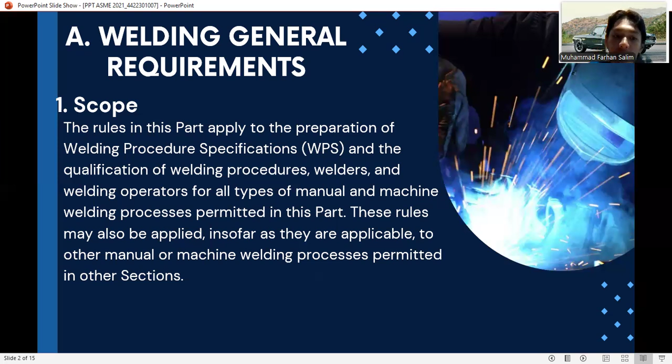Two, procedure specification. The WPS used by an organization that will have responsible operational control of production welding shall be a WPS that has been qualified by that organization in accordance with Article 2, or it shall be an AWS Standard Welding Procedure Specification, or SWPS, listed in Mandatory Appendix E and adopted by that organization in accordance with Article 5.

Both WPS and SWPS specify the variables, including ranges, if any, under which welding must be performed. These conditions include the base metals that are permitted, the filler metal that must be used, if any, preheat and post-weld heat treatment requirements. When a WPS is to be prepared by the organization, it must address as a minimum the specific variables, both essential and non-essential, as provided in Article 2 for each process to be used in production welding.

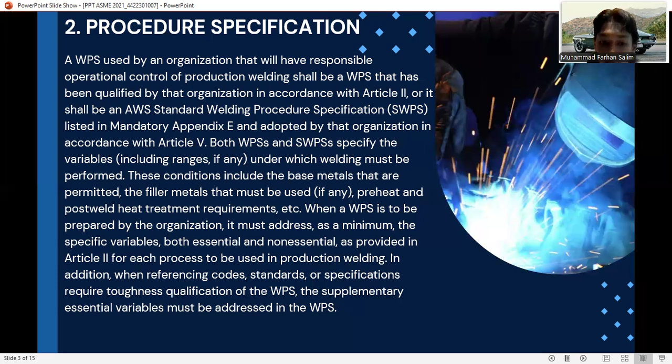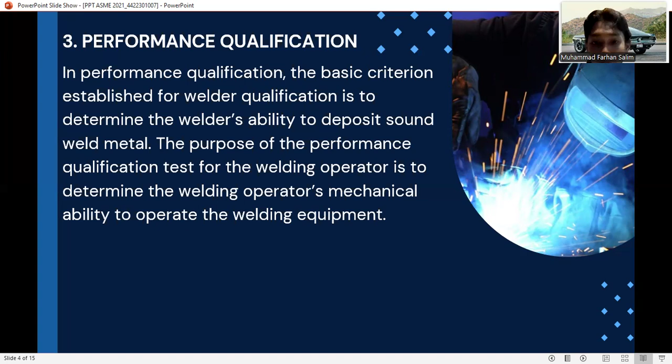Three, performance qualification. In performance qualification, the basic criterion established for welder qualification is to determine the welder's ability to deposit sound weld metal. The purpose of the performance qualification test for the welding operator is to determine the welding operator's mechanical ability to operate the welding equipment.

Four. There are test positions for groove welds and test positions for fillet welds. Groove welds may be made in test coupons oriented in any of the positions described in the following paragraphs, except that an angular deviation of plus or minus 15 degrees from the specified horizontal and vertical planes, and an angular deviation of plus or minus 5 degrees from the specified inclined plane, are permitted during welding.

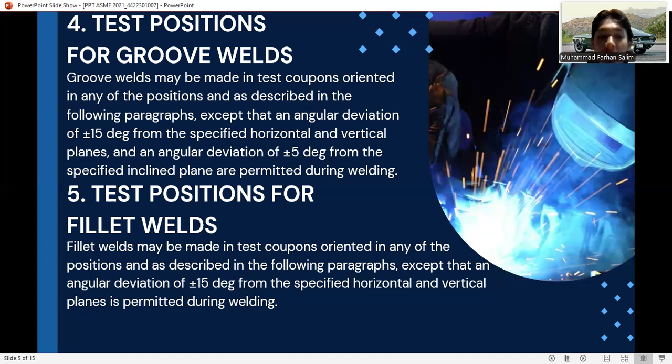And fillet welds may be made in test coupons oriented in any of the positions described in the following paragraphs, except that an angular deviation of plus or minus 15 degrees from the specified horizontal and vertical planes is permitted during welding. There are plate positions for groove and pipe positions for groove.

In plate positions for groove, there are four positions. One, flat position 1G, plate in a horizontal plane with the weld metal deposited from above. Two, horizontal position 2G, plate in a vertical plane with the axis of the weld horizontal. Three, vertical position 3G, plate in a vertical plane with the axis of the weld vertical. And last is overhead position 4G, plate in a horizontal plane with the weld metal deposited from underneath.

There is another material, the pipe positions for groove. There are four pipe positions. First is pipe position 1G, pipe with its axis horizontal and rolled during welding so that the weld metal is deposited from above. Two, horizontal position 2G, pipe with its axis vertical and the axis of the weld in a horizontal plane. Pipe shall not be rotated during welding.

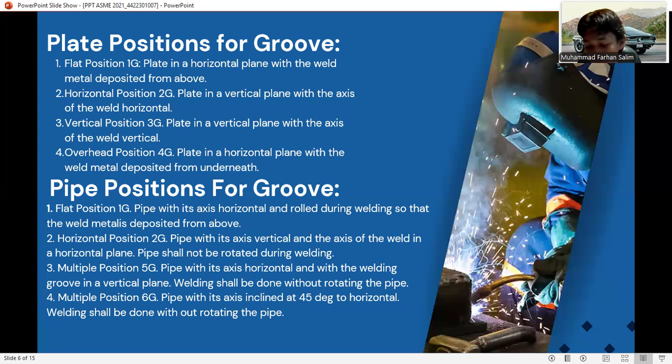And there are plate positions and pipe positions for fillet. First, flat position 1F, plates so placed that the weld is deposited with its axis horizontal and its throat vertical. Two, horizontal position 2F, plates so placed that the weld is deposited with its axis horizontal on the upper side of the horizontal surface and against the vertical surface.

Three, vertical position 3F, plates so placed that the weld is deposited with its axis vertical. And last, overhead position 4F, plates so placed that the weld is deposited with its axis horizontal on the underside of the horizontal surface and against the vertical surface.

And there are pipe positions for fillet. First is flat position 1F: pipe with its axis inclined at 45 degrees to horizontal and rotated during welding so that the weld metal is deposited from above, and that at the point of deposition the axis of the weld is horizontal and the throat vertical.

2. Horizontal positions 2F and 2FR. A. Position 2F: pipe with axis vertical so that the weld is deposited on the upper side of the horizontal surface and against the vertical surface. The axis of the weld will be horizontal and the pipe is not to be rotated during welding. B. Position 2FR: pipe with its axis horizontal and the axis of the deposited weld in the vertical plane. The pipe is rotated during welding.

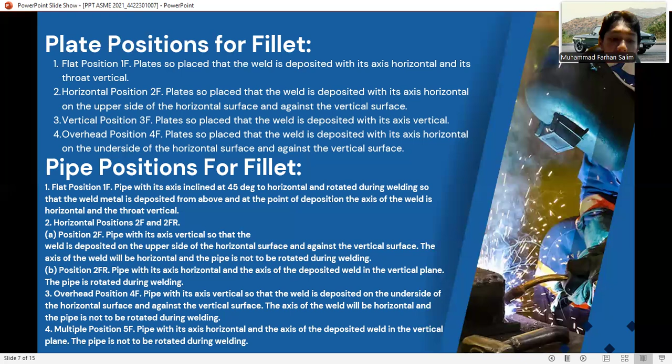3. Overhead position 4F: pipe with its axis vertical so that the weld is deposited on the underside of the horizontal surface and against the vertical surface. The axis of the weld will be horizontal and the pipe is not to be rotated during welding. And last, multiple position 5F: pipe with its axis horizontal and the axis of the deposited weld in the vertical plane. The pipe is not to be rotated during welding.

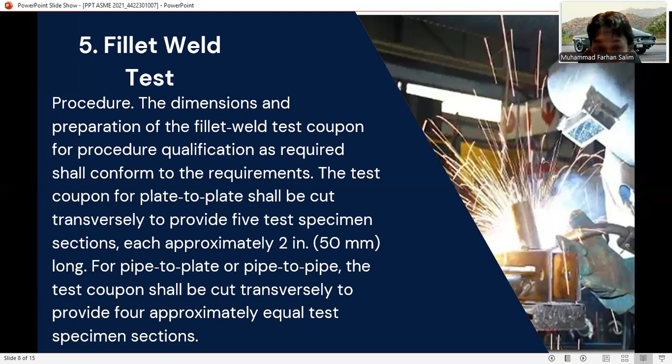And 5 is fillet weld. First is test procedure. The dimensions and preparation of the fillet weld test coupons for procedure qualification as required shall conform to the requirements. The test coupon for plate to plate shall be cut transversely to provide 5 test specimen sections, each approximately 2 in. (50 millimeters) long. For pipe to plate or pipe to pipe, the test coupon shall be cut transversely to provide four approximately equal test specimen sections.

And title B is welding procedure qualification. Each organization shall prepare written welding procedure specifications that are defined as follows. A. Welding Procedure Specification, or WPS. A WPS is a written qualified welding procedure prepared to provide direction for making production welds to code requirements. The WPS or other documents may be used to provide direction to the welder or welding operator to assure compliance with the code requirements.

B. Contents of the WPS. The completed WPS shall describe all the essential, non-essential, and when required, supplementary essential variables for each welding process used in the WPS. These variables are listed for each process in QW-250 and are defined in Article 4, Welding Data. The WPS shall reference the supporting procedure qualification records, or PQR, described in QW-200.2. The organization may include any other information in the WPS that may be helpful in making a code weldment.

C. Changes to the WPS. Changes may be made in the non-essential variables of the WPS to suit production requirements without requalification, provided such changes are documented with respect to the essential, non-essential, and when required, supplementary essential variables for each process. This may be by amendment to the WPS or by use of a new WPS. Changes in essential or supplementary essential variables require requalification of the WPS or new additional PQRs to support the change in essential or supplementary essential variables.

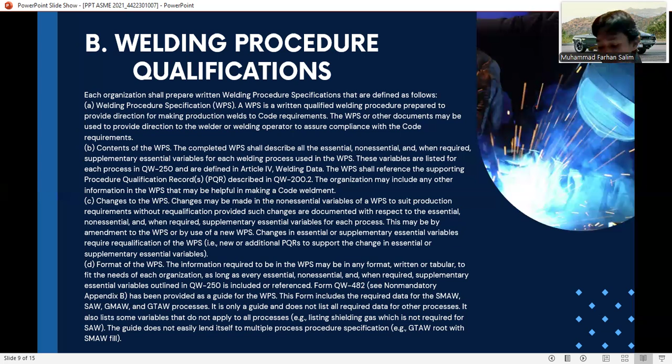C. Welding performance qualification. This article lists the welding processes separately with the essential variables that apply to welder and welding operator performance qualification. The welder qualification is limited by the essential variables given for each welding process. These variables are listed in QW-350 and are defined in Article 4, Welding Data. The welding operator qualification is limited by the essential variables given in QW-360 for each type of weld.

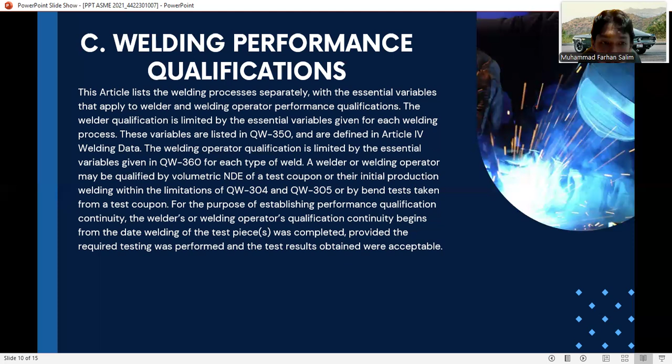A welder or welding operator may be qualified by volumetric NDE of the test coupon or their initial production welding within the limitations of QW-304 and QW-305, or by bend tests taken from test coupons. For the purpose of establishing performance qualification continuity, the welder's or welding operator's qualification continuity begins from the date welding of the test pieces was completed, provided the required testing was performed and the test results obtained were acceptable.

Test. Intent of test. The performance qualification tests are intended to determine the ability of welders and welding operators to make sound welds. Qualification test. Each organization shall qualify each welder or welding operator for each welding process to be used in production welding. The performance qualification test shall be welded in accordance with a qualified welding procedure specification (WPS) or standard welding procedure specification (SWPS) listed in Mandatory

Appendix E, except that when performance qualification is done in accordance with a WPS or SWPS that requires preheat or postweld heat treatment, this may be omitted. Changes beyond which requalification is required are given in QW-350 for welders and in QW-360 for welding operators. Allowable visual, mechanical, and radiographic examination requirements are described in QW-304 and QW-305.

Retest and renewal of qualification are given in QW-320. The welder or welding operator who prepares the groove weld WPS qualification test coupons meeting the requirements of QW-200 is also qualified within the limits of the performance qualification listed in QW-304 for welders and in QW-305 for welding operators. The welder or welding operator is qualified only within the limits for positions specified in QW-303.

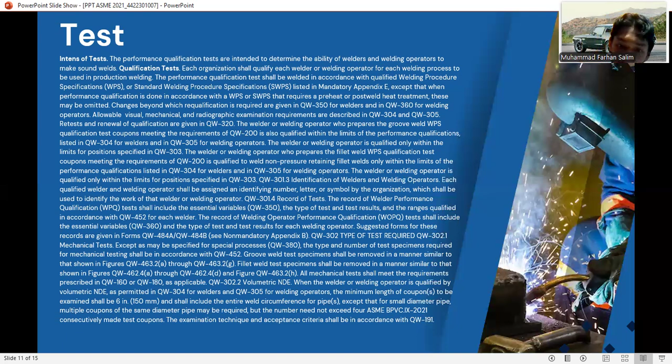The examination technique and acceptance criteria shall be in accordance with QW-191. Retest and renewal of qualification. Retests: a welder or welding operator who fails one or more of the tests prescribed as applicable may be retested under the following provisions.

Immediate retest using visual examination. When the qualification coupon has failed the visual examination, retesting shall be by visual examination before conducting the mechanical testing. When an immediate retest is made, the welder or welding operator shall make two consecutive test coupons for each position which he has failed, all of which shall pass the visual examination requirements. The examiner may select one of the successful test coupons from each set of retest coupons which pass the visual examination for conducting the mechanical testing.

Immediate retest using mechanical testing. When the qualification coupon has failed the mechanical testing, the retesting shall be by mechanical testing.

When an immediate retest is made, the welder or welding operator shall make two consecutive test coupons for each position which he has failed, all of which shall pass the test requirements. Immediate retest using volumetric NDE: when the qualification coupon has failed the volumetric NDE, the immediate retest shall be by the same examination method.

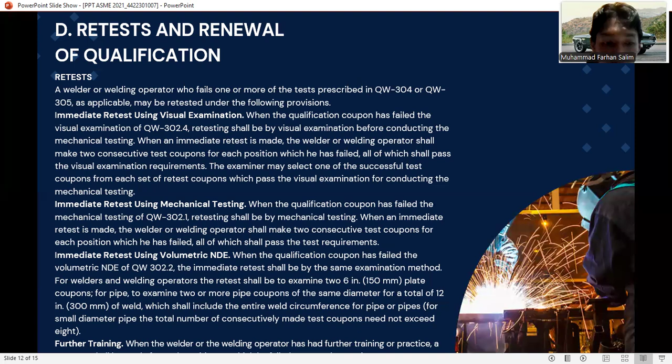For welders and welding operators, the retest shall examine two 6 in. (150 mm) plate coupons, or two or more pipe coupons of the same diameter for a total of 12 in. (300 mm) of weld, which shall include the entire weld circumference of the pipe or pipes for small diameter pipe. The total number of consecutively made test coupons need not exceed eight. And then further training: when the welder or the welding operator has had further training or practice.

Expiration, revocation, and renewal of qualification. Expiration means the qualification of a welder or welding operator for a process remains valid provided no more than 6 months have passed since the welder or welding operator last used the process. Continuity of qualification shall be confirmed by the qualifying or participating organization as identified respectively. A welder using manual or semi-automatic welding prolongs qualification for both manual and semi-automatic welding for the process. A welding operator using machine or automatic welding prolongs qualification for machine or automatic welding for that process.

Revocation is when there is specific reason to question the welder or the welding operator's ability to make welds that meet the specification. The qualifications that support the welding being performed shall be revoked. All other qualifications not questioned remain in effect. And there is renewal of qualification.

A renewal of qualification that has expired under the rules may be achieved for any process by welding a single test coupon of either plate or pipe, of any material thickness or diameter, in any position and successfully completing the testing. This renews the welder or welding operator's previous qualification for that process for those material thicknesses, diameters, positions, and other variables for which he was previously qualified, provided the requirements are satisfied. Renewal of qualification may be done on production work.

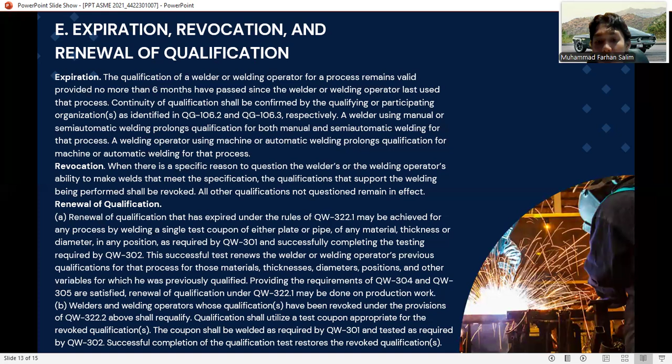And the last is welding data. The variables: each general welding variable described in this article is applicable as an essential, supplementary essential, or nonessential variable for procedure qualification when referenced for its specific welding process. Essential variables for performance qualification are referenced for each specific welding process. A change from one welding process to another welding process is an essential variable and requires requalification. Supplementary essential variables for procedure are in addition to essential variables for each welding process.

When the procedure has been previously qualified to satisfy requirements other than toughness, it is then necessary only to prepare an additional test coupon using the same procedure with the same essential variables, but additionally with all of the required supplementary essential variables, with the coupon long enough to provide the necessary toughness specimens. When a procedure has been previously qualified to satisfy all requirements including toughness, but one or more supplementary essential variables are changed, then it is only necessary to prepare an additional test coupon using the same welding procedure and the new supplementary essential variables, with the coupon long enough to provide the necessary toughness specimens.

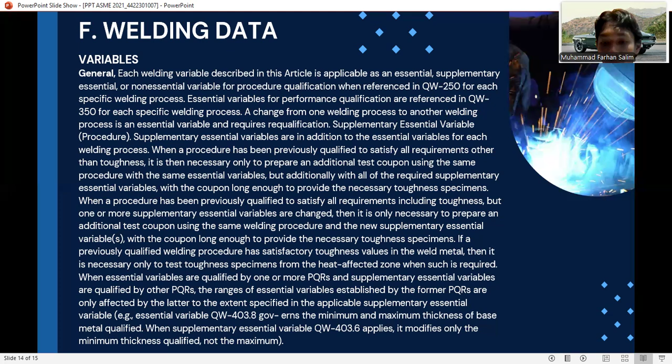If a previously qualified welding procedure has satisfactory toughness values in the weld metal, then it is necessary only to test toughness specimens from the heat affected zone when such are required. When essential variables are qualified by one or more PQRs and supplementary essential variables are qualified by other PQRs, the ranges of essential variables established by the former PQRs are only affected by the latter to the extent specified in the applicable supplementary essential variables, for example, the minimum and maximum thickness of base metal qualified. When a supplementary essential variable applies, it modifies only the minimum thickness qualified, not the maximum.

So that is my presentation about ASME Section IX 2021.